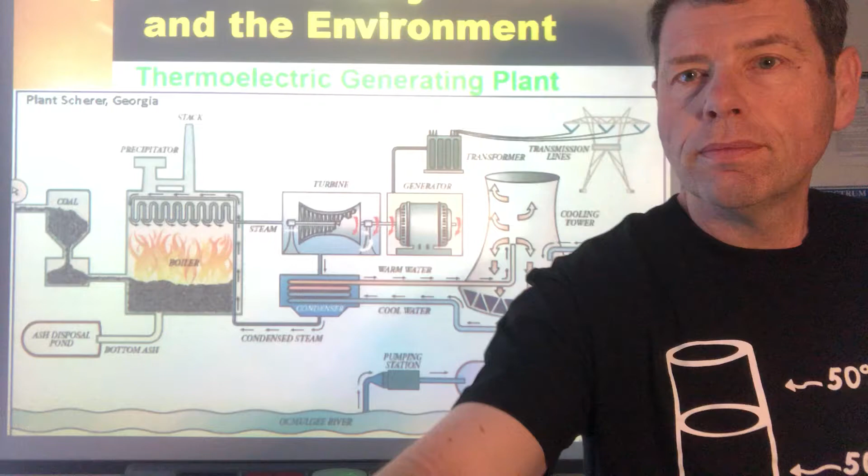Hey, grade 9s. In this topic 8, we're going to be talking about electrical power generation and how it potentially affects the environment. This is going to help you go through your notes package, find those answers for topic 8.

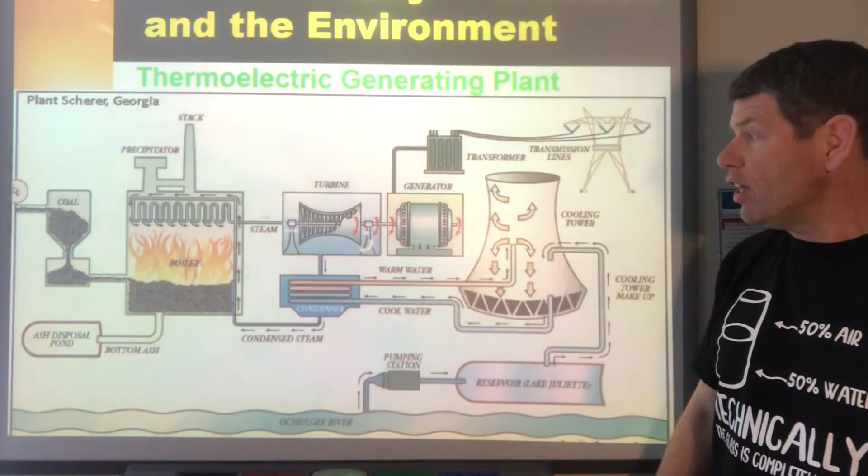We're starting here with a thermoelectric generating station or plant, which relies on fossil fuels, and that's primarily how we make our electricity here in Alberta. We have some kind of fossil fuel, in this diagram it's coal. The coal goes into a boiler, and we've got water moving through pipes that gets superheated. We create steam, and the steam goes through a turbine, which causes rotational motion to cause the coils of wire in this generator moving in a magnetic field to create our electricity. That's kind of how it's done here in Alberta primarily.

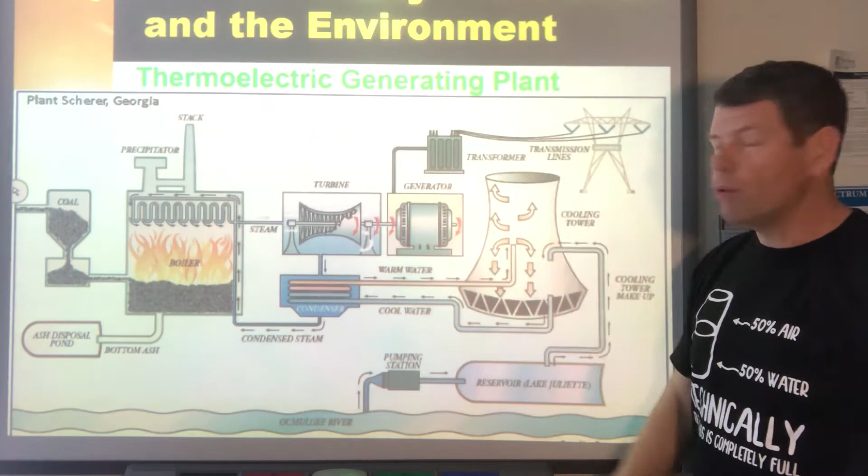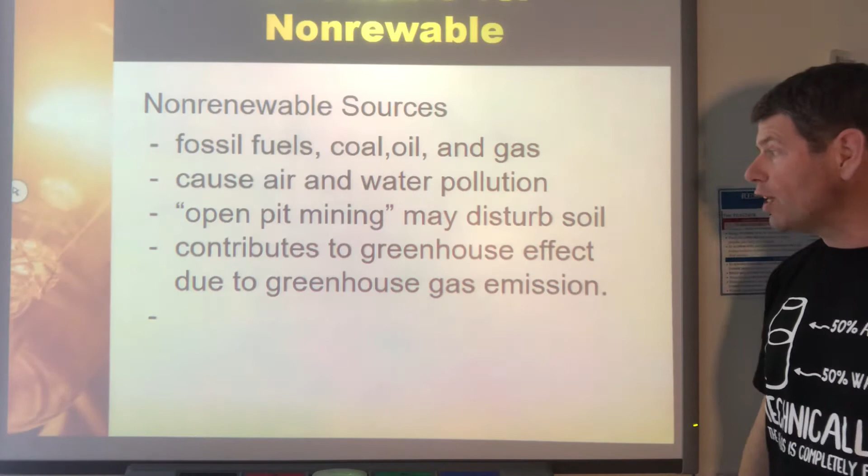This leads us into a conversation between renewable versus non-renewable resources. Non-renewable sources, such as fossil fuels, coal, oil, and gas, mean that we're going to be running out of them. There's not a continuous supply. Some negatives also are that we're going to get air and water pollution. You might have to have an open pit to mine your coal or to get your oil, and that may disturb the soil and the environment. It also can contribute to the greenhouse effect because we're producing a lot of carbon dioxide, a greenhouse gas.

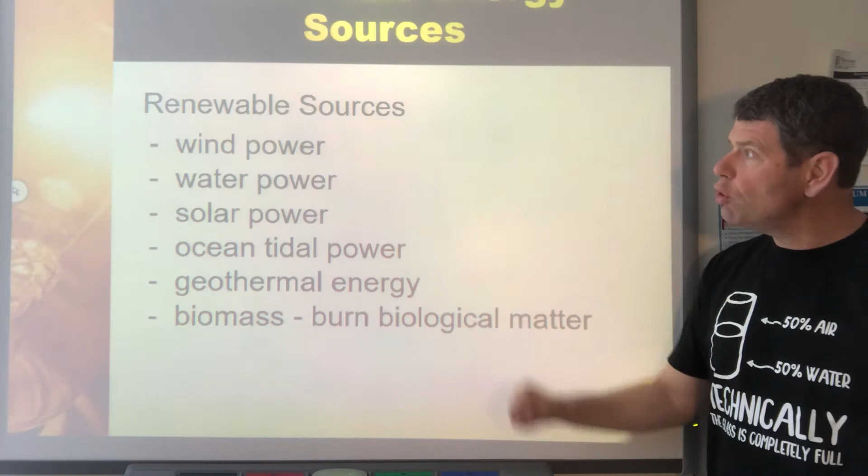On the flip side, this chapter discusses some renewable sources of generating electricity in a plant of some sort. We can harness wind power, those great big wind farms especially in areas of southern Alberta, or water power, used quite a lot in Ontario and Quebec because they have a lot of lakes and rivers to provide water power. Or solar power, solar panels, solar farms, ocean tidal power, or we could harness the energy within the earth itself, geothermal energy. Another renewable source we could burn besides fossil fuels is biomass, like wood.

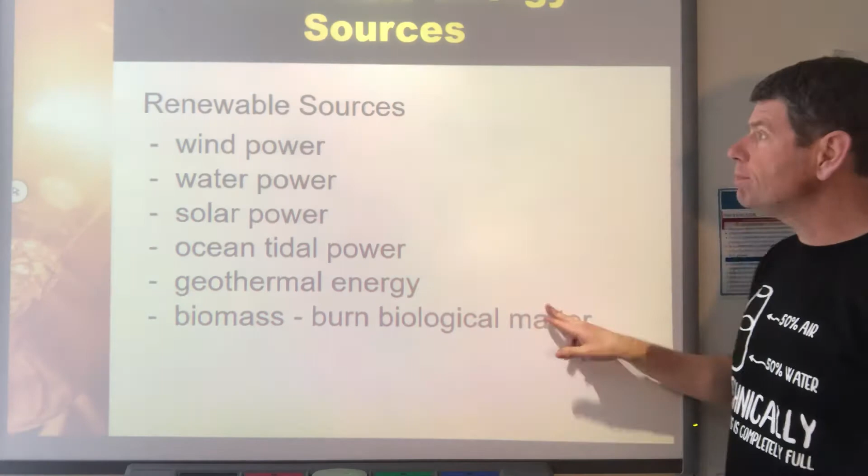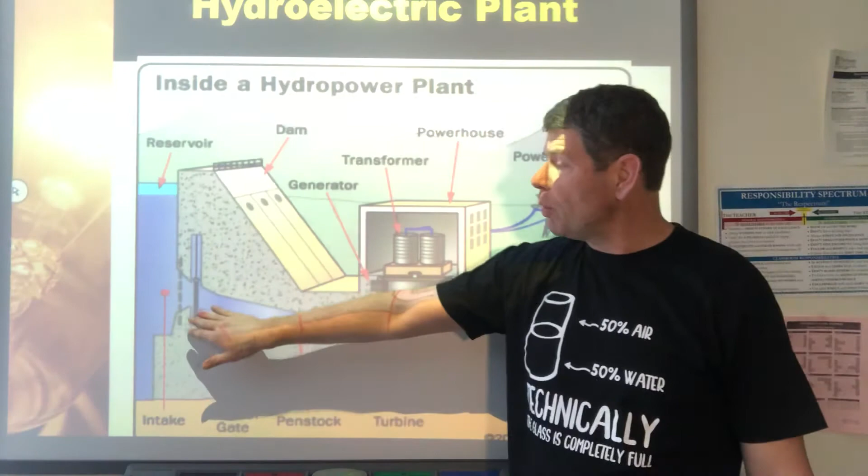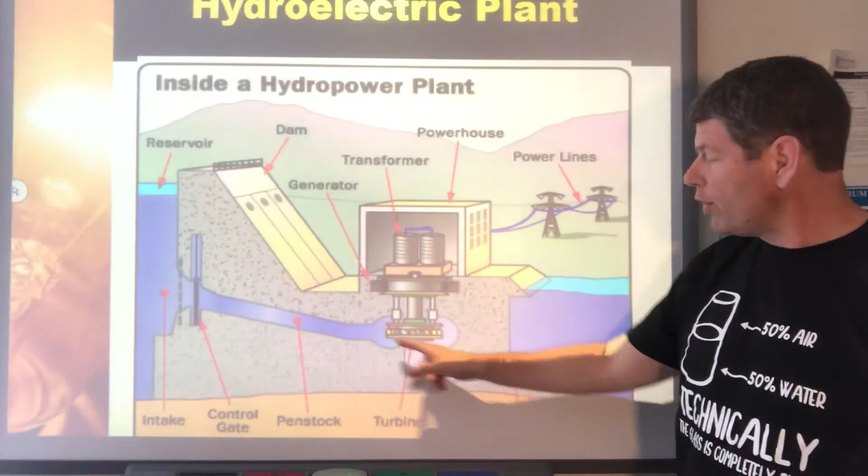Now let's take a look at how a hydro power plant works. You need to make a dam, and you dam up a river, for example. That puts a lot of water behind the dam, which creates an awful lot of water pressure. Down here, you allow the water to flow from its area of high pressure to an area of lower pressure, with gravity providing that force. The water goes through essentially a water wheel, which is this turbine, which again runs a generator to create the electricity. Then the water is allowed to continue its flow downstream.

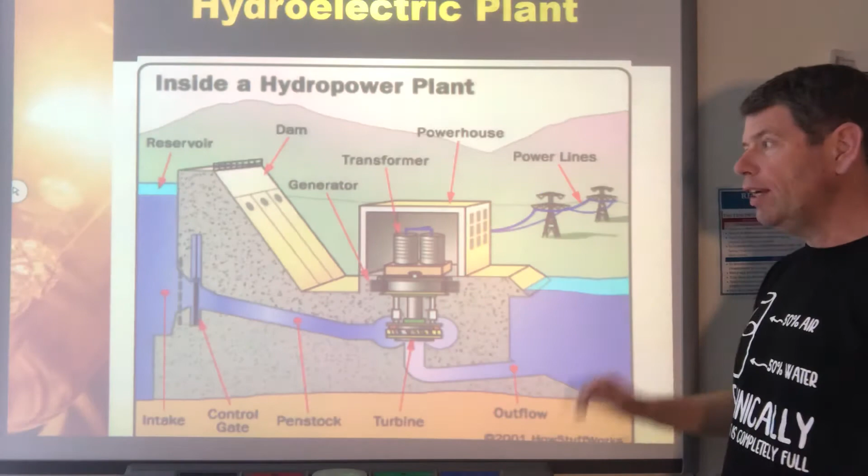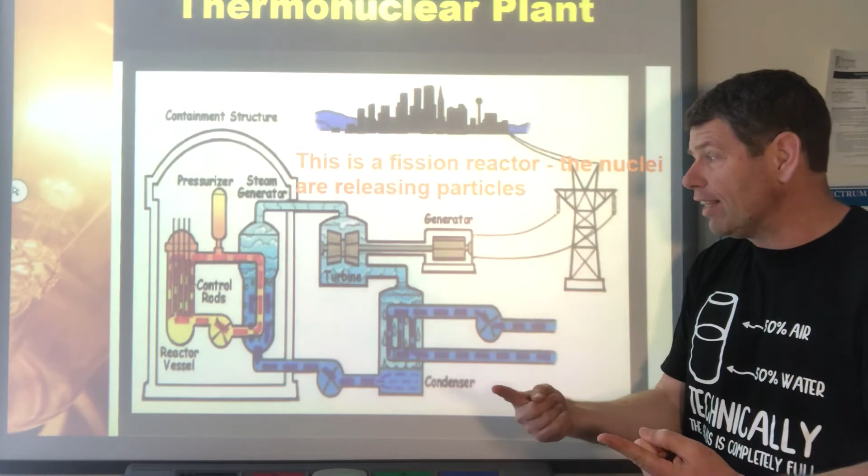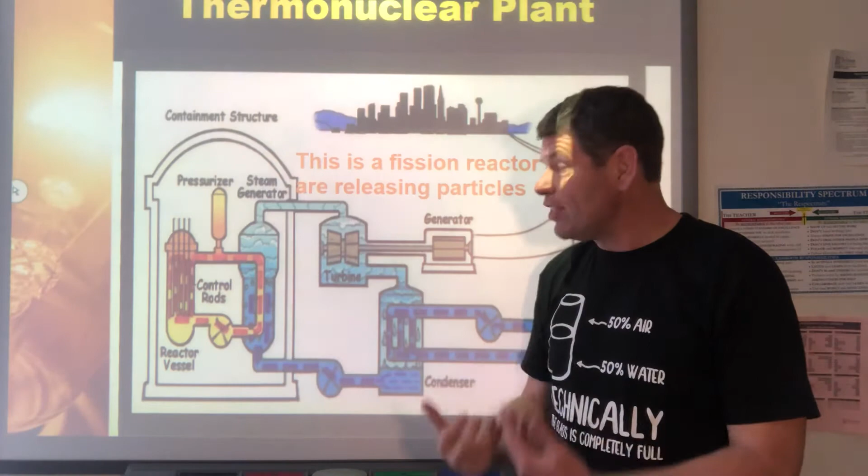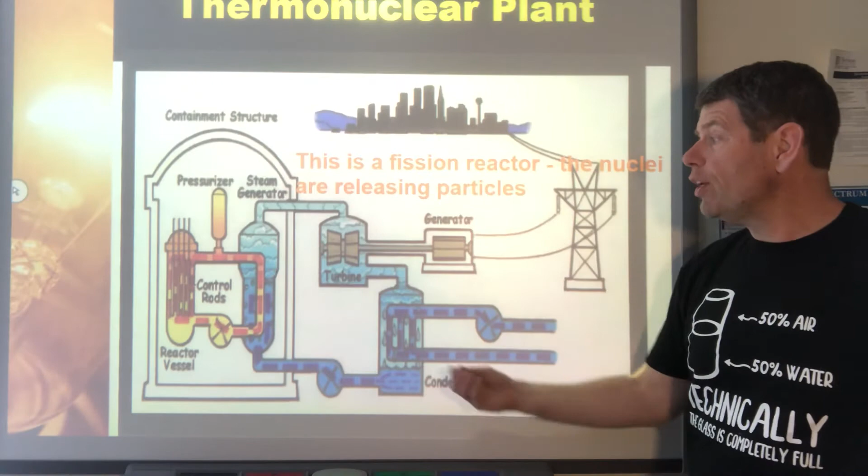Or we could have a nuclear plant, using a material that's radioactive. This is called a fission reactor because we're taking nuclear material that has the tendency to break down. Fission is when larger nuclei release particles and break into smaller nuclei, and in that process they generate a lot of heat. We have control rods of nuclear material that can be lowered or raised to control the amount of heat generated, which again causes water to turn into steam. Just like the fossil fuel thermoelectric station, we use that steam to turn a turbine, connected to a generator, which makes our electricity.

Now the next slide gives us the difference between fission and fusion. Fission is where larger nuclei break down into smaller nuclei. Fusion is the opposite: smaller nuclei are fused together to make a larger nucleus, and this still generates an awful lot of heat. It's the way the sun works. The sun takes hydrogen atoms and under intense pressures pushes them together to make a helium atom from two hydrogen atoms, and that creates a lot of heat, which is essentially what the sun provides us with on a daily basis.

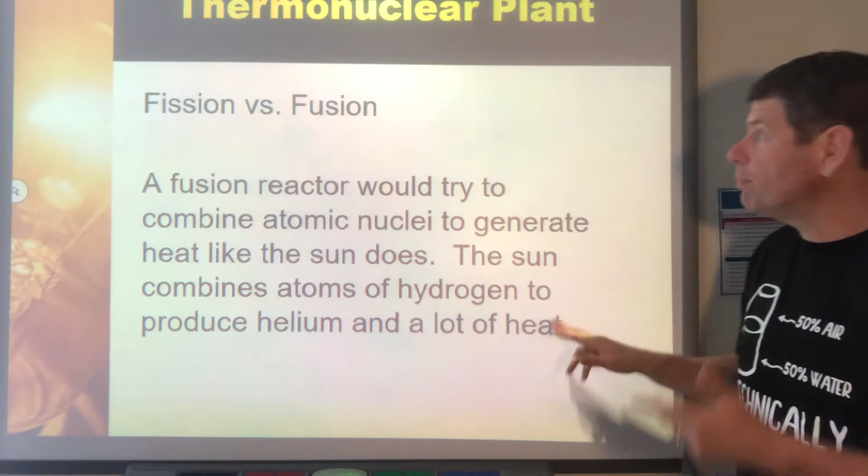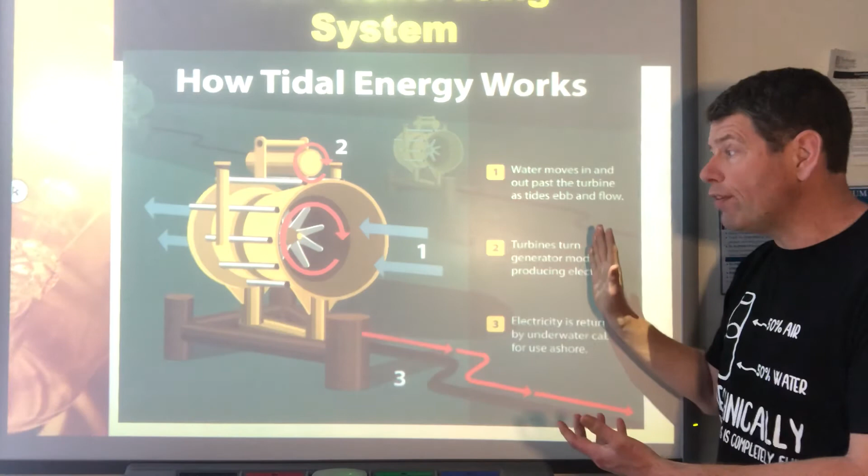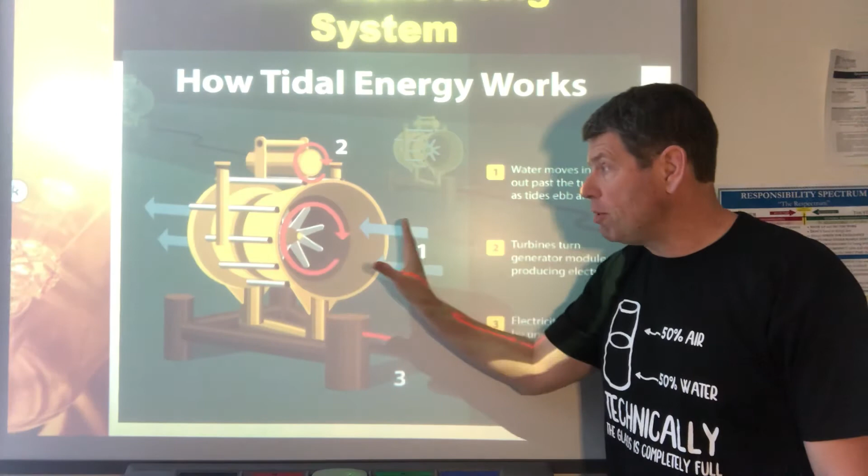Now we could harness the energy of the tides, and that can be done in a number of different ways, but essentially you have a turbine capturing the energy as the tides are driven by the actions of the sun and the moon. It's a natural process where water moves one way, and we've got turbines situated to capture that energy, or if the tide moves the other way, it essentially works like a wind station, but under the water.

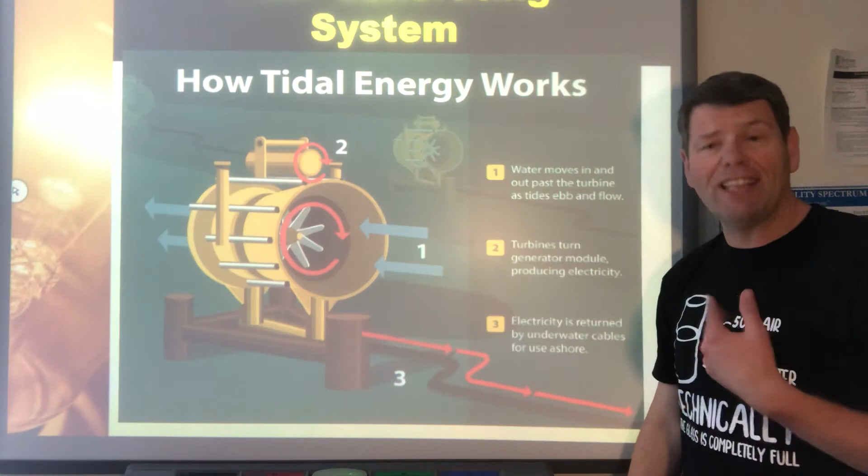Lastly, guys, there's this thing called cogeneration. If you have an electricity generating system functioning using a lot of heat or steam, it makes sense to use that heat or steam to either generate more electricity than you actually need, which you can sell back to the grid, or use that heat, that hot water, that steam to heat large buildings. That way, it's much more efficient. It's called cogeneration because co means you're generating not just one thing but two, like electricity and also heat, two different forms of energy.